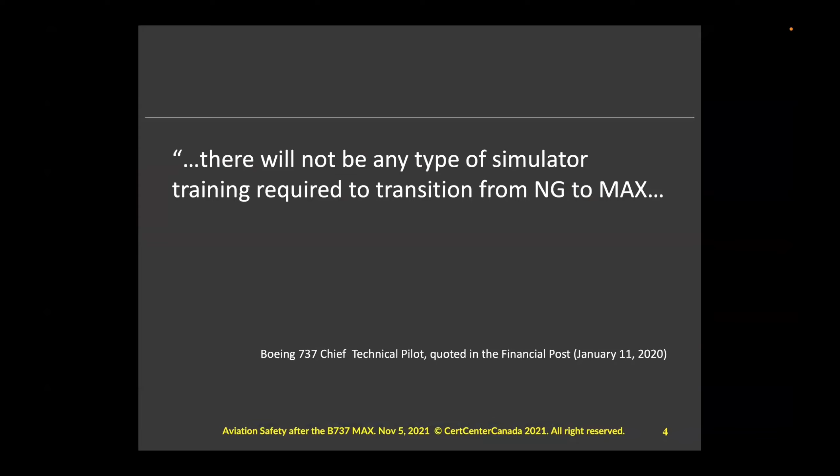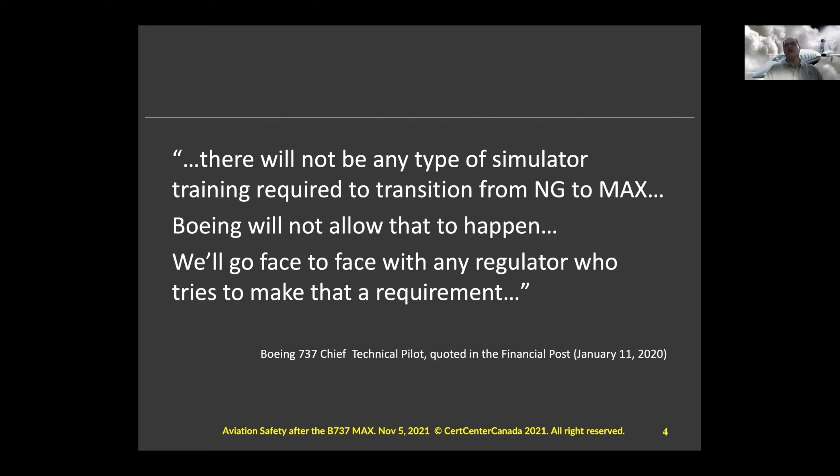So we've seen that Boeing is facing enormous lawsuits, so let's find out how they got into this position. First of all, these are my opinions. They're not Transport Canada's, and I'm not acting as a delegate, so please be aware of that and take it accordingly. I'm going to look at how we certify, what happened to the MAX, the two accidents, and the lessons learned. First of all, certification.

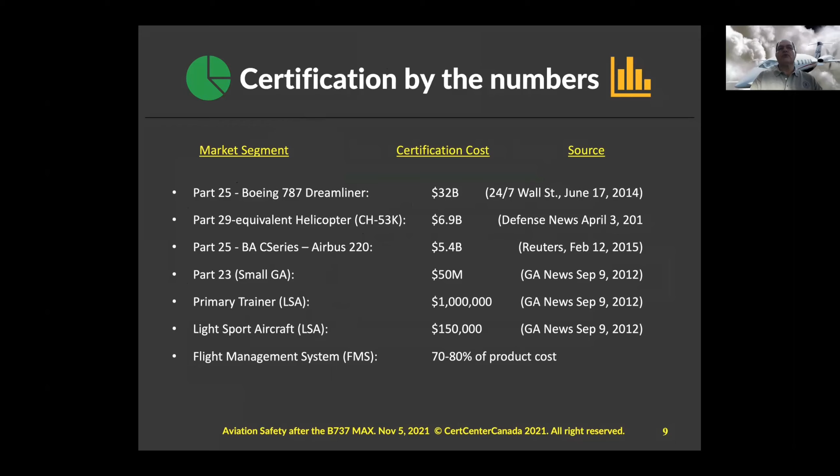To give you an idea what it costs to certify an aircraft: if we look at the top row there, it's of the order of tens of billions of dollars. And not only is certification expensive, but changes to certification are very expensive. In fact, many aircraft programs are bet-the-company programs. The 747, for example, was one such program.

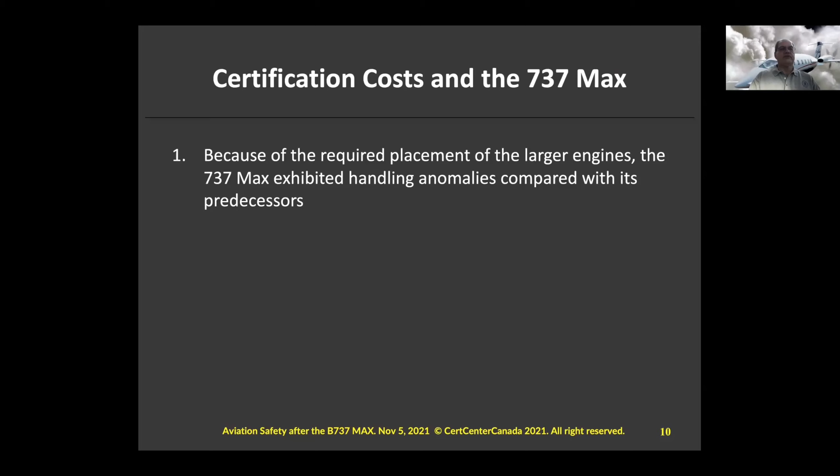So let's look at the MAX. Big engines, bigger than before. They had to be crammed higher up on the wing than the old ones to clear the ground. And so it handled differently. That meant that pilots would need some training. And if the pilots needed training, the simulators would have to be changed and the reference materials would have to be changed. So this is not a matter of whether the airplane is safe or unsafe. It has nothing to do with that.

It has to do with: will Southwest now have to modify its simulators, write new training materials, double qualify pilots for MAX and non-MAX? The repercussions to an airline are in the hundreds of millions for these types of changes. They're not trivial in any sense of the word. So the reason we don't want to train people is not because we want untrained people. It's because if we accept that the aircraft is different enough that we need to train everyone, then we have to adopt different training programs for different pilots, use simulators, etc.

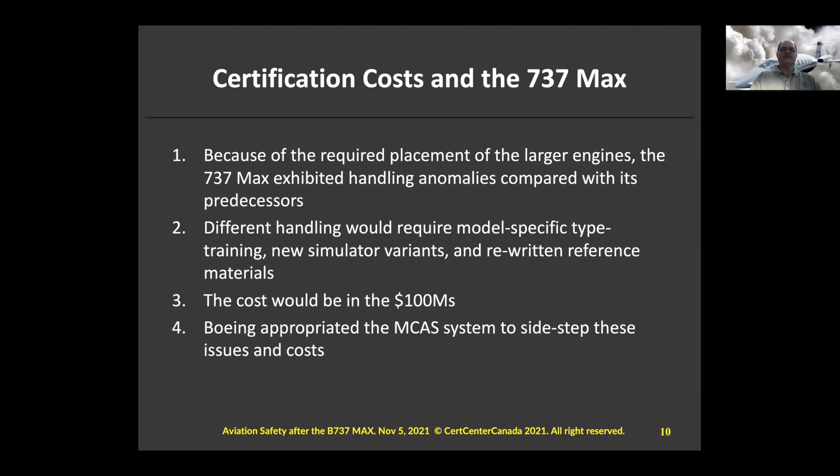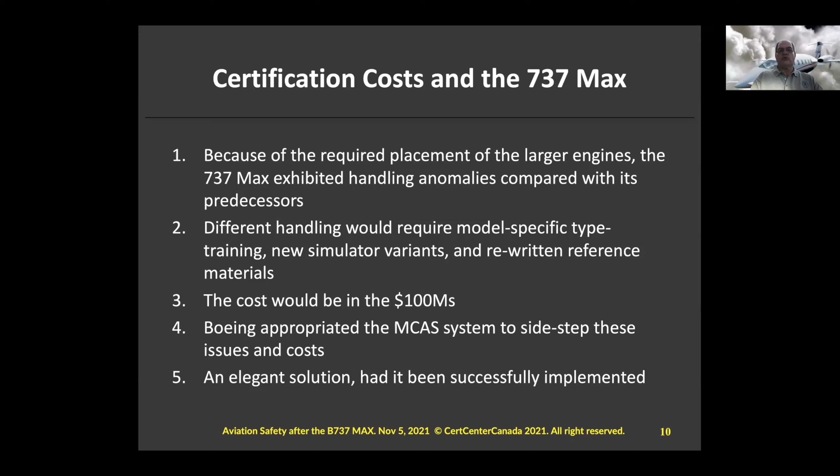So there was enormous pressure on Boeing to not have recognizable differences between the MAX and the preceding models. So they appropriated the MCAS, which was used in another aircraft, I believe the 767, for different purposes, to try and sidestep these issues. And I don't mean that in a mean way. I mean to skirt around them in a way that was functional. Had it been done successfully, it would have been an elegant way out of it. The pilots would not have known the difference between the MCAS-equipped MAX and the normal 737s, Southwest wouldn't have had to spend any more money, and that would have been fine. Let's have a look at certification, and you'll see where this went wrong.

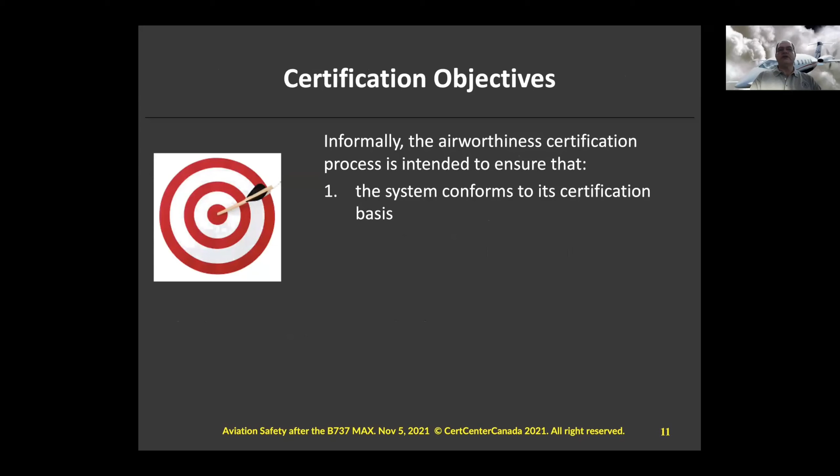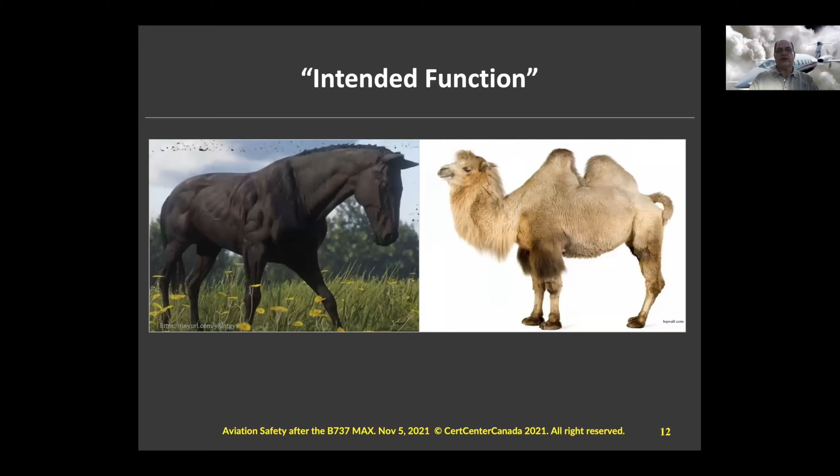We intend with certification to do two things: make sure that we basically meet the cert requirements and standards, and make sure that the system performs its intended function safely and effectively. Intended function is in the eye of the beholder. One could ask, which of these is a better vehicle? And of course, the answer is, it depends. In Canada, which is very similar to the States, we have an act that empowers the regulations, which invoke standards that are supported by guidance and advisory material.

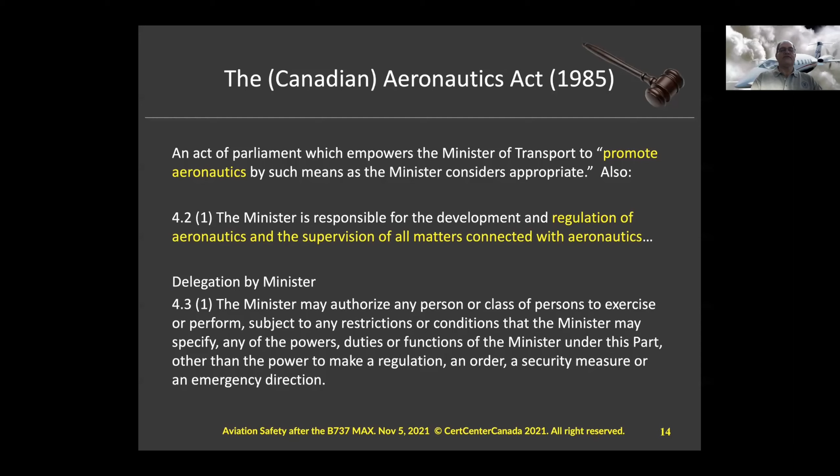The Canadian Aeronautics Act has a dual role for the minister, which is interesting because the MAX plays into this. The minister is responsible for regulation and for promotion, which is an absolutely conflicting situation of trying to promote and regulate at the same time. The minister also is in charge of delegation, which allows people like me to act as test pilots for Transport Canada. Now, this conflict of promoting and regulating was taken away from the FAA after the ValueJet crash, where the two functions were split between the NTSB and the FAA. So the FAA has no promote-aviation function anymore. And this is where it happened, in 1996.

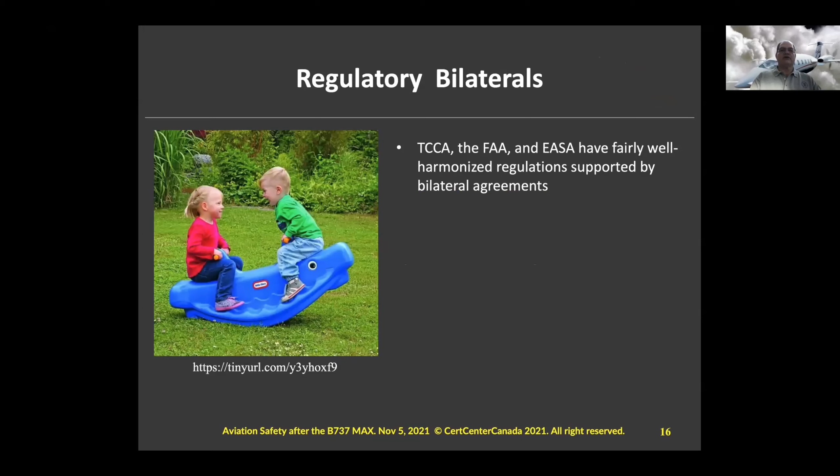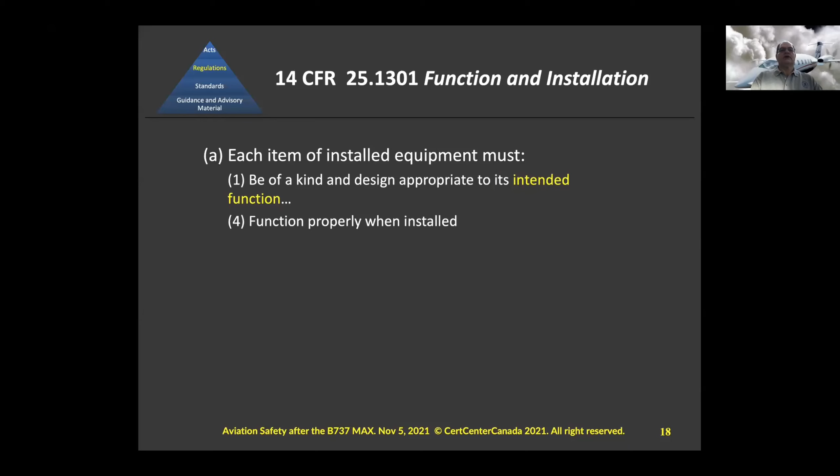So we have bilaterals between the FAA, Transport Canada, and EASA. Basically, if a dispute arises, the various authorities take it up with each other. And of course, the 737 MAX was certified by such a bilateral. I'm going to go very briefly into software certification. Again, it's about intended function: does it do what it's supposed to do? How do we show that we meet the requirements of the certification? Well, we can do various things.

We can analyze. We can inspect, go and look at the thing. We can see that it's the same as the last one, which may or may not apply. We'll see in a minute. And we can simulate, and finally, we can flight test. Any combination of these things will be used to show that we are meeting our certification requirements. Oh, and we can ground test, of course.

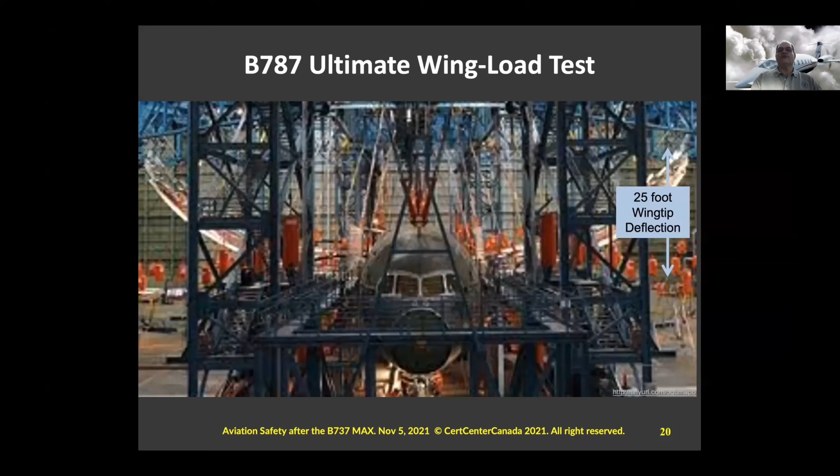This is how you ground test a 787. You can't see clearly in this picture, but the wingtips are the extreme edges of the picture, which is about 25 feet deflection. So if you're wondering if the wings will fall off a 787, if you can still see out of the window and they're not obstructed completely by the wings bending above your head, then no, the wings won't fall off. I won't show you this video, it's a bit long. It's actually showing that test. You can look it up online and look at them when they actually break the wings off.

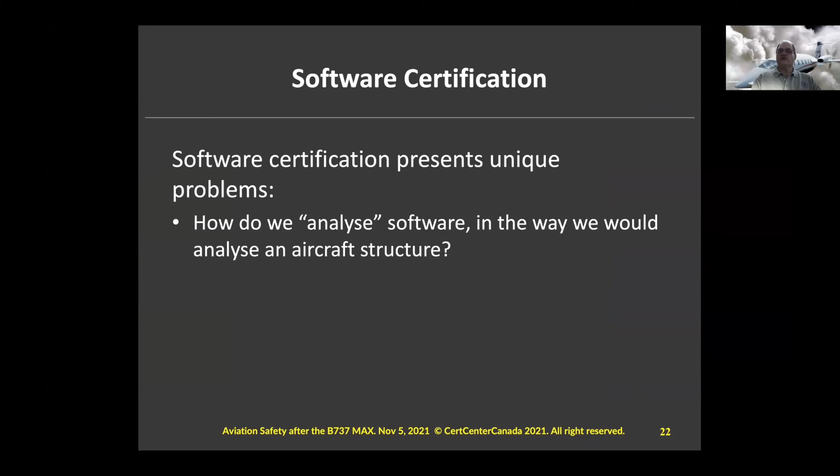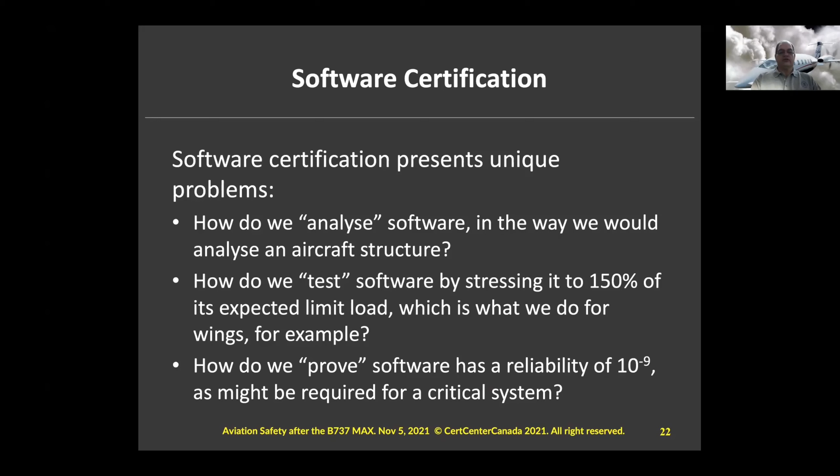Now let's take a look at software, the MAX. How do we analyze software in the way we tested those wings for bending until they broke? How do we test it to 150% of the expected loads, which is what we do for an airframe? How do we prove the software has a reliability that we need? And the answer is, we can't ever prove these things. All we can do is decide how serious the consequence is and how probable that outcome is. And that is what we call the risk.

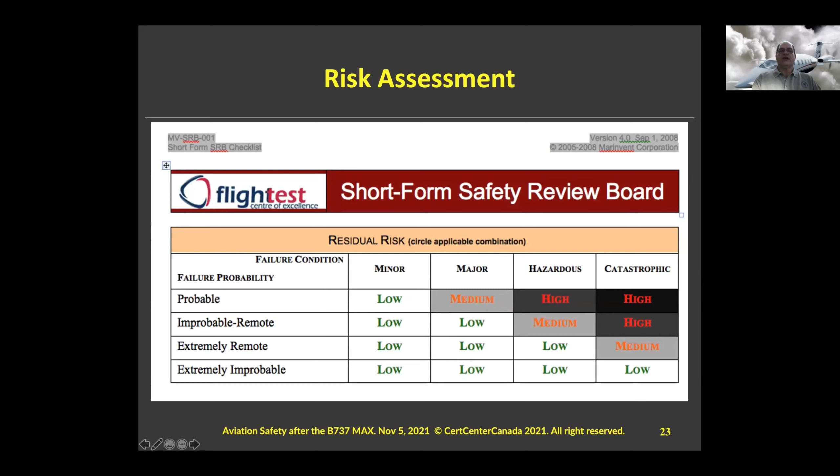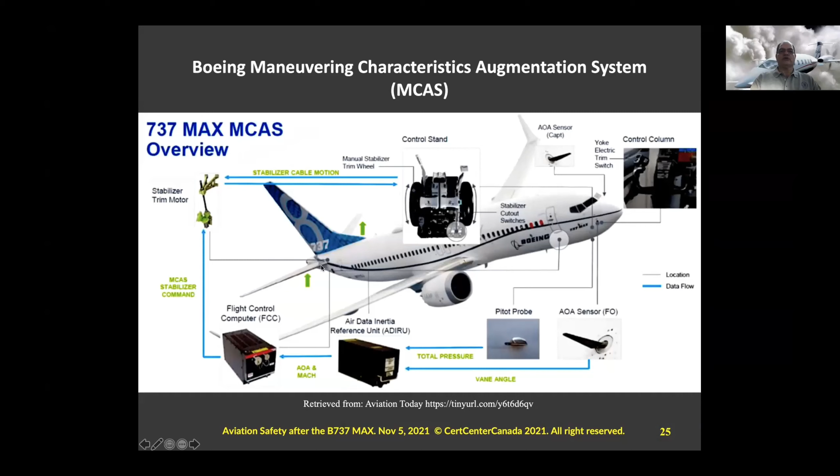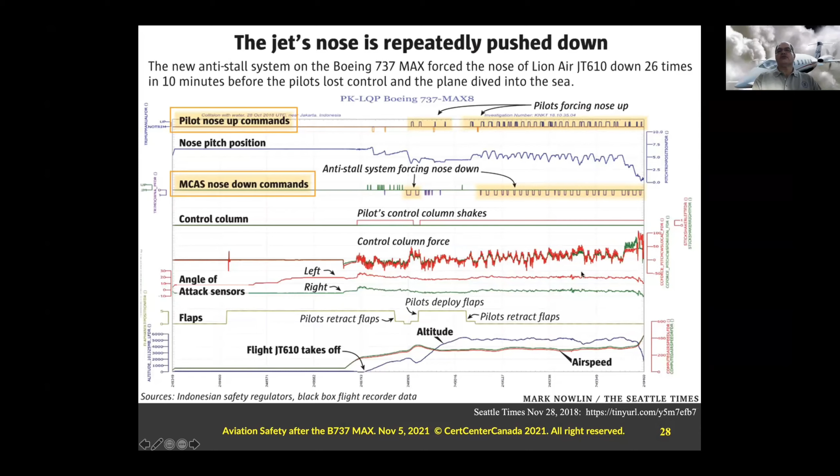Let's look at these accidents and see what happened. Well, Lion Air was the first one. And as we can see from these traces, the airplane started oscillating, and then pitching down until it dove into the sea. This was the MCAS at work, and the crew didn't really know at all what was happening. The Ethiopian folks had a very similar accident, and they knew about MCAS and they'd been briefed, and Boeing alleges that they did not follow procedures. Not completely clear was that the procedures could not have worked as published, and I won't go into the technical details, but that's just the case.

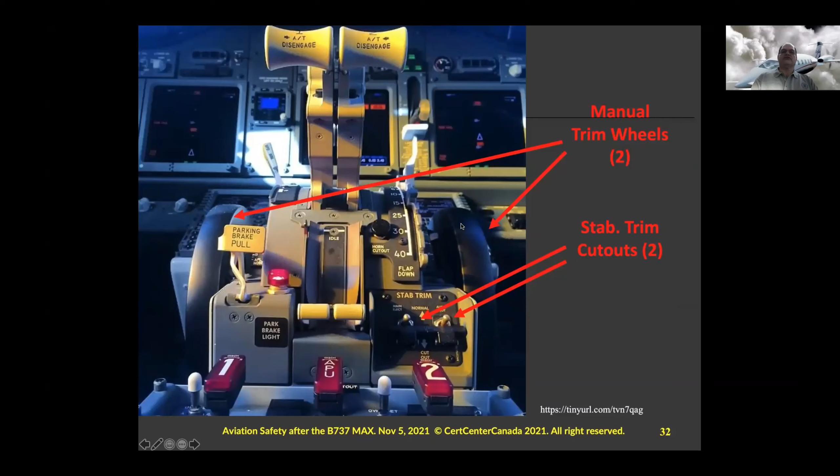So this was the first part of the MCAS procedure, and in their safety analysis, Boeing assumed that pilots would react in the same way as a trim runaway, except that's not what the MCAS does. It moves these trim wheels a little bit, and then takes a deep breath and moves them a little bit more, and then takes another deep breath. So it doesn't behave like the pilots were expecting.

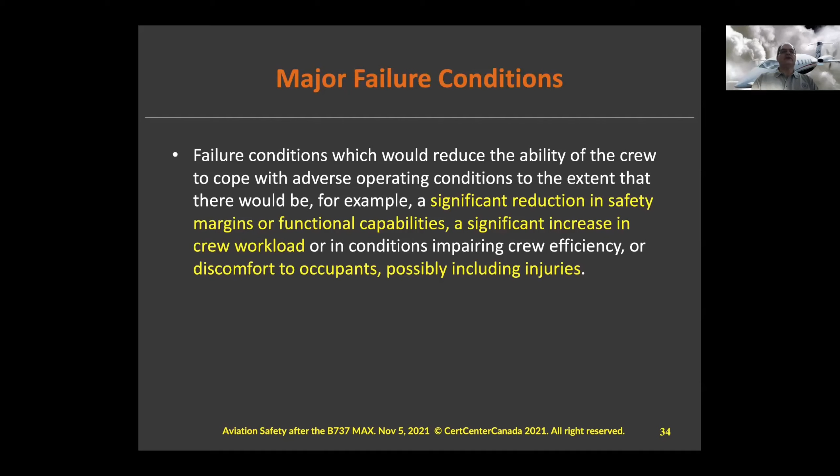Now, we talked about hazards before, and Boeing classified these as major hazards. At major hazards, basically, you are not likely to lose the aircraft, kill anyone. You may injure someone because of a G-force or something like that. These classifications were absolutely wrong. The actual correct classification was catastrophic, which is in the worst case, you will lose the aircraft. Here's a major failure condition, a reduction in safety and discomfort, possibly injuries.

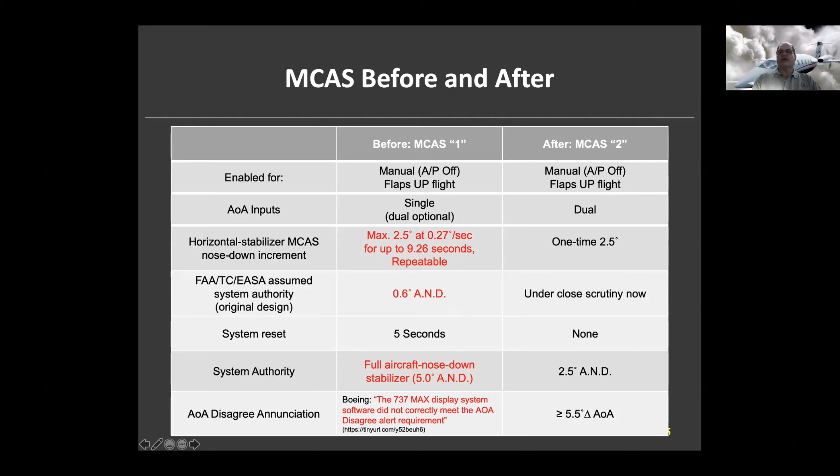As it was implemented, it could repeat forever, every 9 seconds, all the way to the limits of the system that they could trim the aircraft, so 5 degrees aircraft nose down. It had other problems, but the basic thing that happened here is the MCAS had much, much more, actually unlimited authority to control the airplane, whereas as designed, it was not supposed to have that kind of authority. Now in the new MCAS, they've reduced the authority back towards the original design.

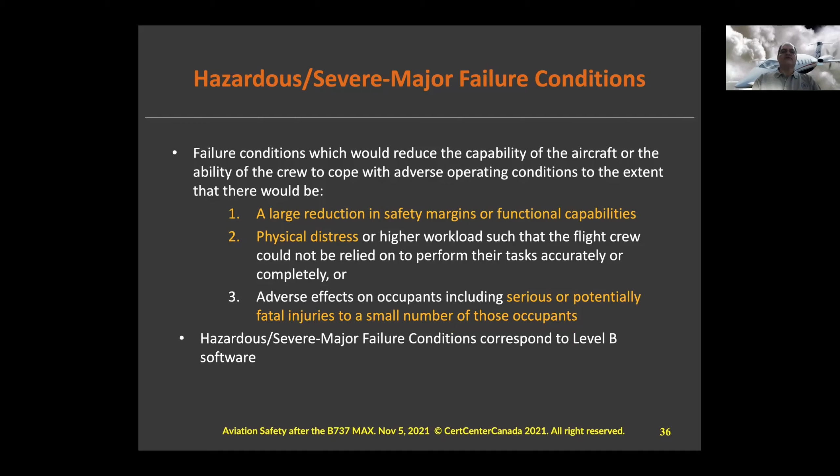So what's a catastrophic failure condition? Well, hazardous severe major is where you can fatally injure some people, and then you also have physical distress and large reduction in safety. Finally, catastrophic is where you lose the aircraft.

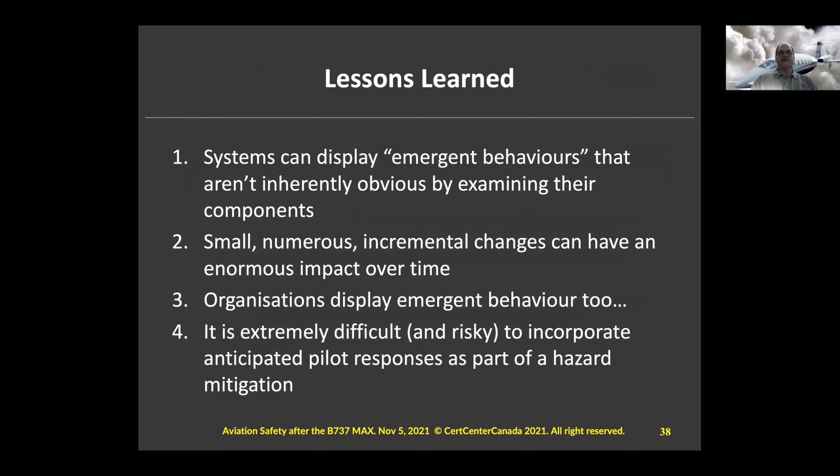Now let's have a look at the lessons learned. Systems display emergent behaviors which aren't by design. I'll show you some of those in a minute. Small, numerous incremental changes can have an enormous impact over time. Organizations display emergent behavior, and it is extremely risky to incorporate how the pilots will respond as part of your safety case, even though that's inherent in the regulations.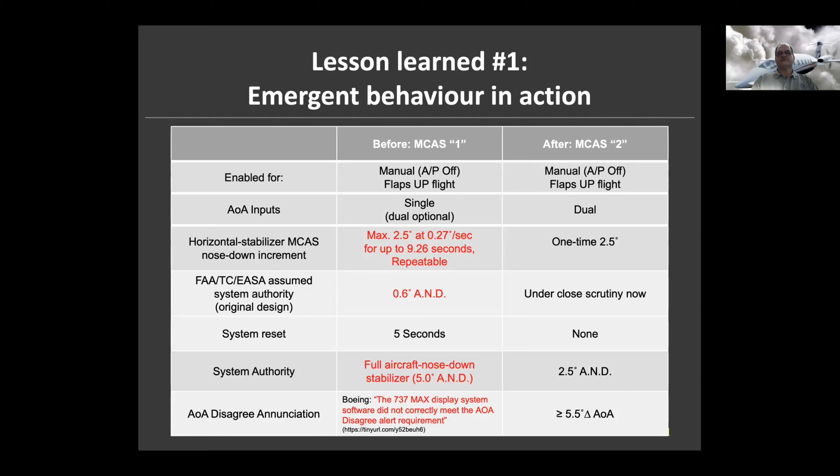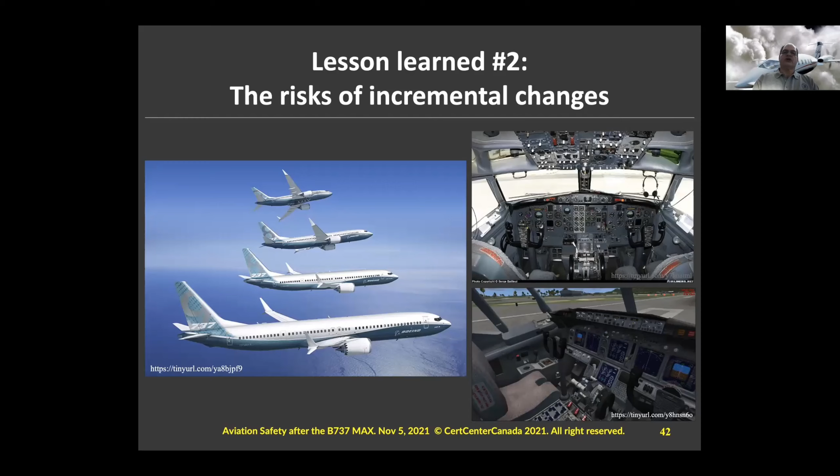Looking at the second element, incremental changes. This is a family tree from the 737, and it's allowed to be certified under the same type certificate. Having a look at the aircraft sizes, the latter ones are almost twice the size, almost twice the thrust. Look at the cockpits, old at the top, new at the bottom, completely unrecognizable, and yet more or less certified under the same type certificate. It's okay from one model to the next, but when you add all those increments together, here's a comparison.

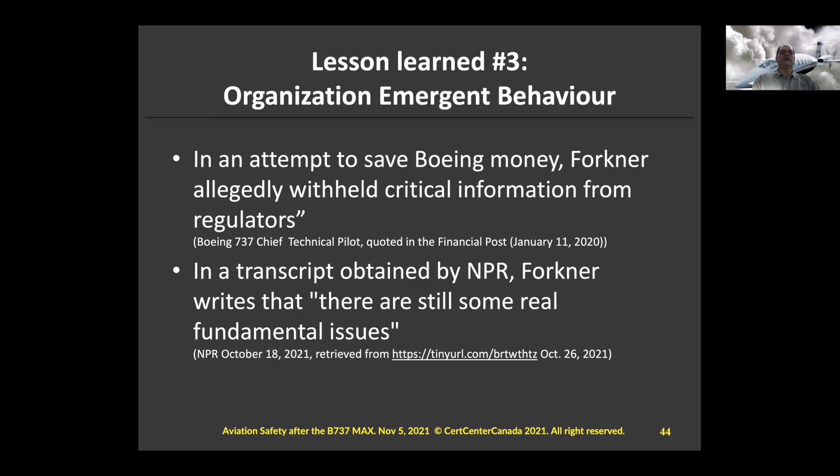So, organizational behavior. In an attempt to save money for Boeing, and this is company fidelity that Forkner was showing, he withheld critical information. He wasn't saying we need untrained pilots, let them take their chances. He was saying that the MCAS should handle the system and we can avoid all the expense that I showed at the beginning. In this, he was wrong and it was bad judgment. I don't think this was an evil act, I think it was a very ill-considered one. But that went through the whole company and eventually to the point where he actually, although he understood there were real issues, withheld that information from the regulators. So that's where he crossed the line completely from company man to well, potential indicted criminal.

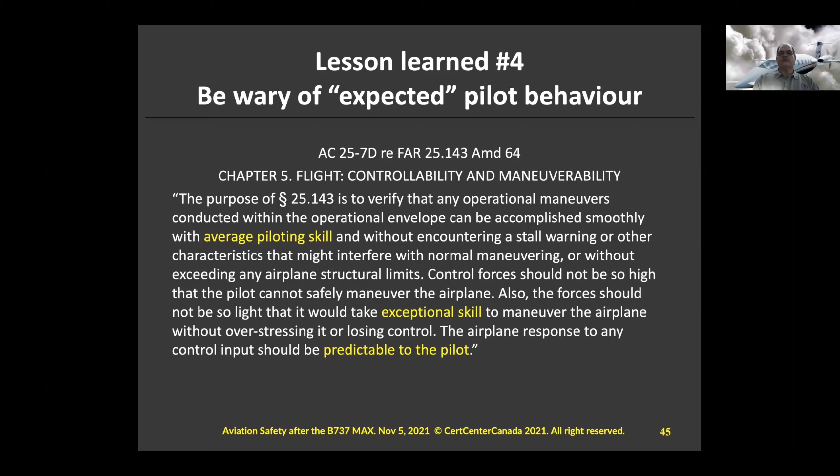Last lesson learned, and I'm almost done here. The regulations repeatedly state that a pilot mustn't have to exhibit more than average skill, should certainly not have exceptional skill, and the system response should be predictable to the pilot. When I do flight test work, one of the things I have to do is not act like I've done 100 practices at this one maneuver, but try and put myself in the shoes of someone who's flying his or her fifth flight of the evening, having had no lunch or dinner, in bad weather, with a co-pilot that doesn't seem to be on the ball. That's the situation we should be designing for.

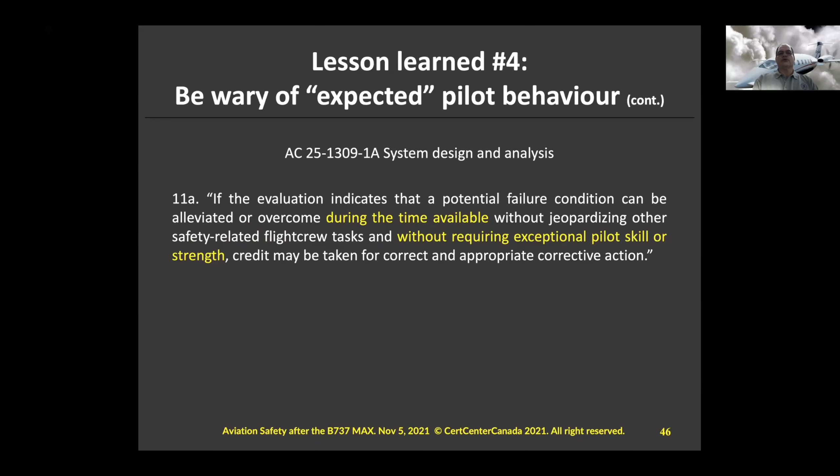So in the time available, the regulation says that we should not have required exceptional pilot skill or strength. And it turns out that both would have been required to implement the Boeing procedures after a few seconds with the MCAS. That's why Ethiopia went down, because they tried the Boeing procedure and it didn't work because they couldn't physically move the trim wheels. So we're back to where we started. Forkner was trying to save Boeing money, well-intentioned.

The documents did not have MCAS reference, nor were the pilot training materials comprehensive. It was a few minutes on an iPad. This is what was found by one of the congressional studies, but it was because the emphasis was supposed to be on similarity with the previous aircraft. It wasn't a lack of caring about pilots or their ability.

It was to try and emphasize just how much this was the same as the old aircraft. So that's where I would like to end it. I'll be happy to engage in questions later, but I think you can see that this very complex interchange of technology, procedures, regulatory imperatives, cost, marketing, and everything else came together for the perfect storm with the Boeing 737 MAX. Thank you for your time.

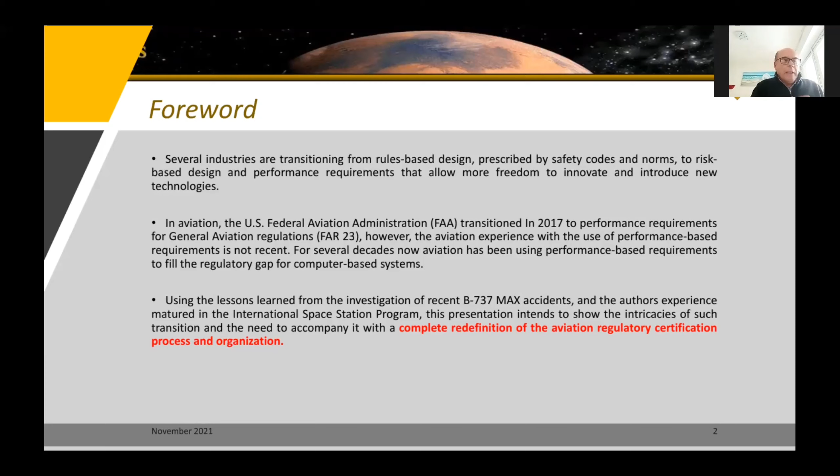Until the 70s, when I was working in industry, up to the beginning of the 80s, every control of the engine, of the flight itself, etc., was managed through mechanical items. From the 80s on, this was changed with the introduction of computers in many of these functions. So at a certain point, an industry that was evolutionary had to adapt to a new setup.

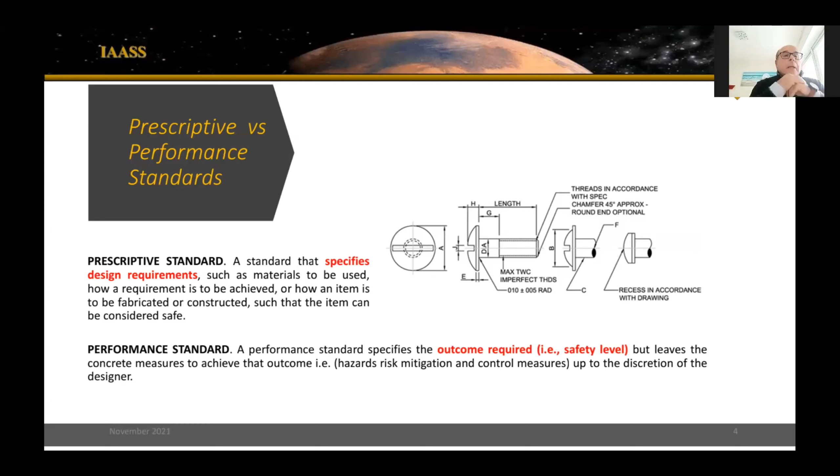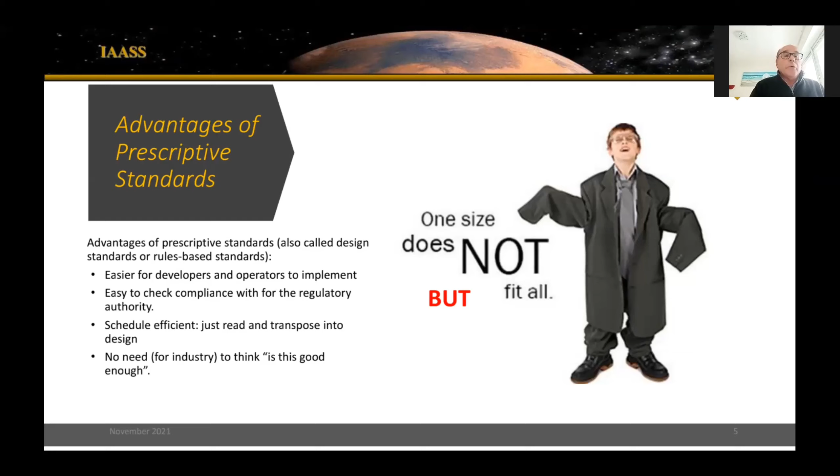So what is the difference between prescriptive and performance standards? As I mentioned, a prescriptive standard is a standard that tells you in detail how you should design your system, while a performance standard specifies the outcome required in terms of safety level. So what is the safety that your system must achieve? The advantage of prescriptive requirement standards is very clear: you follow the rules, you apply the rules. These are inspected, tested, as John was saying, by similarity or by inspection and flight test, etc. And then you comply with the rules and the game is done. There is no need for you, as industry, to think if something is good or not.

There is an example which I always mention about how prescriptive standards fail. Generally, prescriptive standards are issued with a certain state-of-the-art technology in mind. So the example I mentioned is the Titanic, which sank, as many of you will know, in 1912. 1,500 people lost their lives because there were not sufficient lifeboats on board.

This was because the very specific prescriptive requirement about the number of lifeboats on board had been established something like 20 or more years before, based on a tonnage that at that time was the limit.

So prescriptive requirements tend to become obsolete because they basically take into account the technology of the time. They are not very good at anticipating future evolution. So what we call a rules-based design is a design of a system done according to the prescriptive standard.

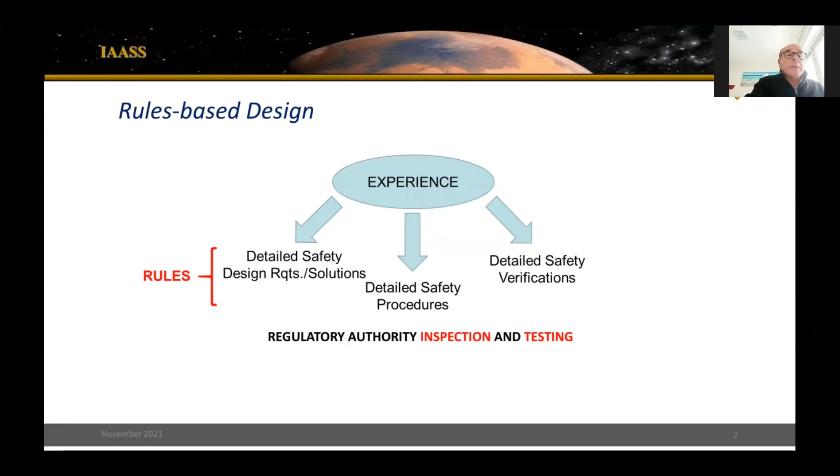Now, performance standards are the other kind of standard, introduced to facilitate innovation, for industries like space or nuclear weapons, where there was no previous experience and no willingness to accumulate experience through accidents.

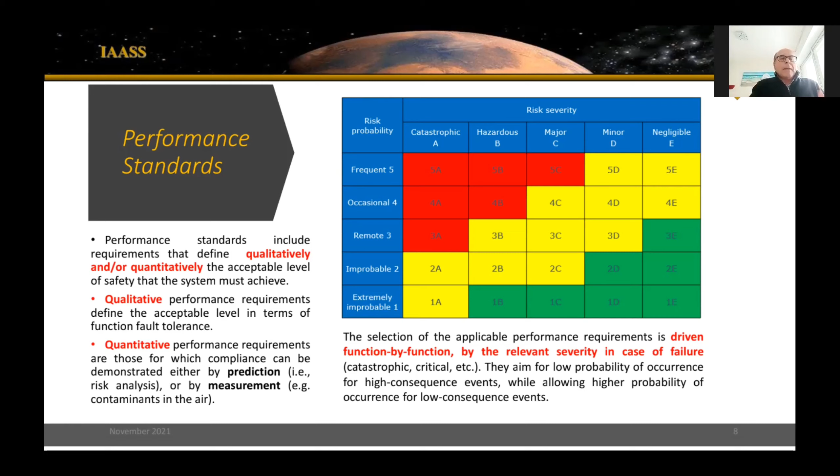Performance standards instead provide either a quantitative target - the failure rate or loss of the system, the dose on board should be less than one in a million flights, for example - or a qualitative requirement, which basically tells you that the system design should aim for, say, fail-safe or fault tolerance in general: the possibility that one part of the system fails but the other part takes over and continues the functionality.

The advantage of performance standards is that they are generic, not linked to a specific technology. But at the same time, they do not present a checklist of how you have to comply, because going from the rules to the detailed design requires, in between, performing a hazard analysis.

What is a hazard analysis? It's very simple: it is the investigation of a potential condition that, as the design is done, could lead to an accident. This is a hazard analysis.

So nowadays, for innovative, very advanced systems, you have fault tolerance requirements. Then you perform a hazard analysis and identify what are the potential conditions that can lead to a failure. And then it is up to the designer to find the design solution which will meet the objective of the performance requirement.

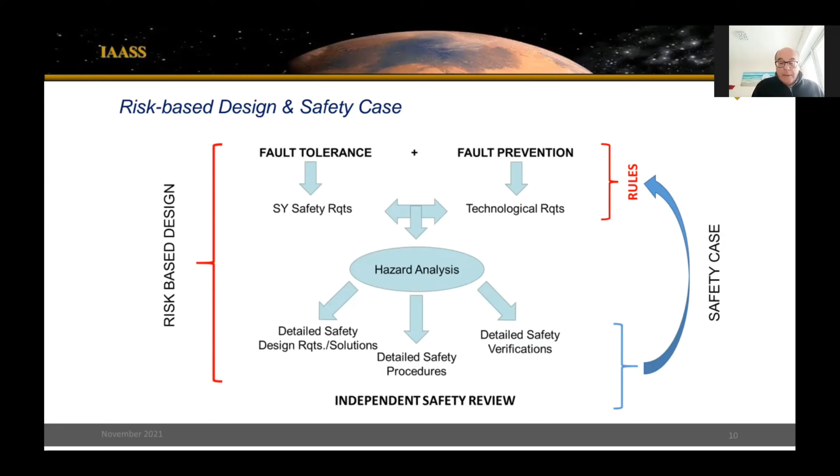What is now the big difficulty linked to performance requirements? You need a client team that can validate the design in terms of meeting the objective. So the team that has to evaluate the design must have not only capabilities of checking analysis, inspection, test results, etc., but must truly have the capability to judge the overall design as able to meet the objective. This means that team needs skills and capabilities equal to, if not better than, the design team.

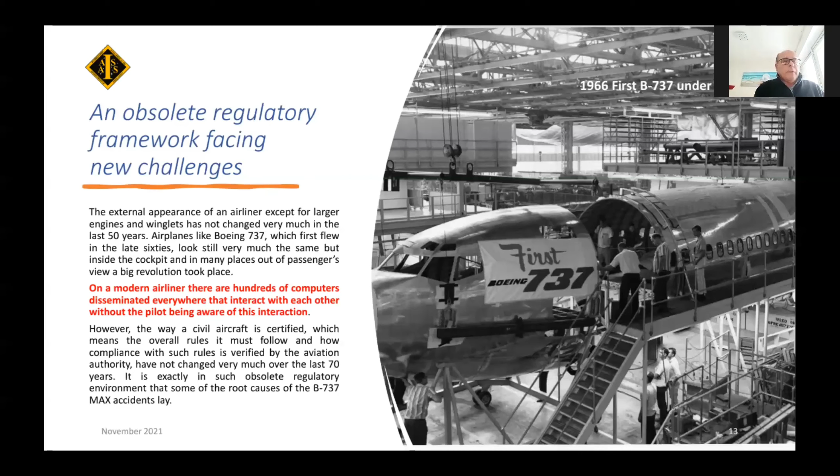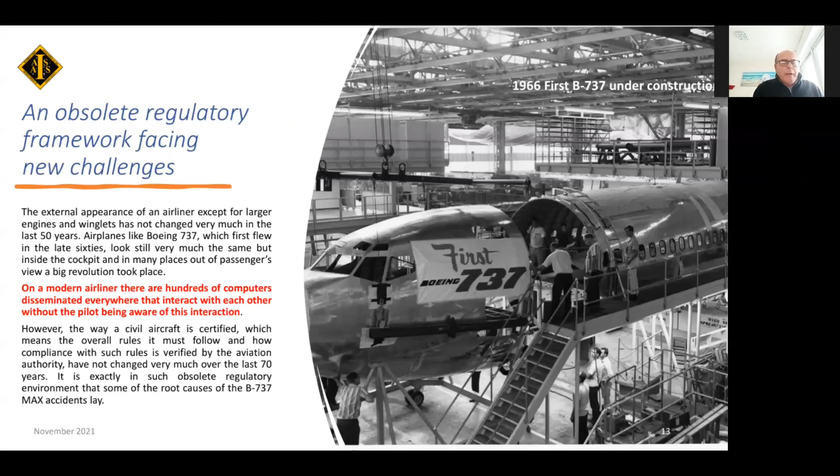The case of MCAS - I will go very quickly. The Boeing 737 entered service in 1967, so it's already more than 50 years in operation and has been evolving continuously. When it was conceived, the B737 was meant to operate at airports that would not have sophisticated ground facilities.

So the airlines, and Lufthansa in fact was the launch airline for the B737, wanted an airplane that would sit very low with reference to the ground, to have the possibility to deploy their own staircase for embarking and disembarking passengers. This gave the Boeing 737 a very typical configuration.

And here is where the problem started in terms of evolution, because the engines in the last 50-plus years have been evolving under various aspects, but physically becoming wider and wider in diameter. This created a conflict with the low stance of the aircraft on the ground, such that when finally the engines were selected for the future version, the B737 MAX, there was only one possibility to place those engines on the airplane: to move them ahead of the wing and a bit higher.

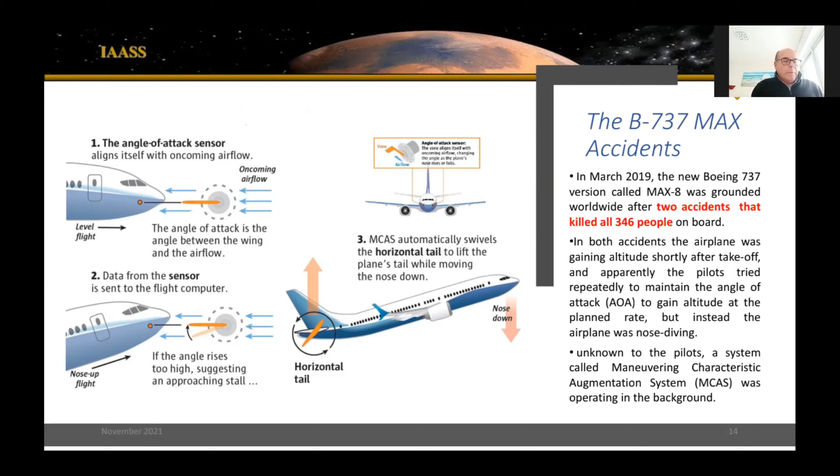By doing this, Boeing basically altered the intrinsic stability of the airplane. And this is when they introduced MCAS, to avoid that the airplane, during certain maneuvers, could exceed a certain angle of attack and therefore go into a very dangerous situation, which is called a stall.

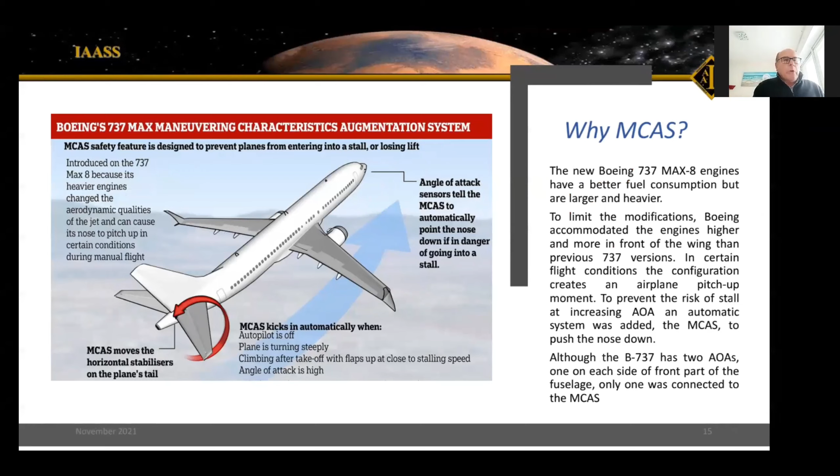Now, I mentioned automation. Automation in aviation started in 1980, and basically the idea was very simple: no longer a physical, mechanical, and sometimes hydraulic connection between flight controls and the pilot input, or between the pilot input and the engine, but instead a data bus computer.

Now the problem with the computer is very simple. We don't have a requirement at that time, and we don't have today, and we will not have in the future, to say exactly how a new system should be designed to be safe. So we can say what the system has to achieve, we can give performance requirements, but we cannot give detailed prescriptive requirements.

The computer has one characteristic: you cannot be 100% sure that it will always work well. So from this comes the necessity to have a second computer doing the same function as the primary one, and then you need a third computer to compare the results of the first and the second, and sometimes you need a fourth one if you want to continue operation, the so-called fail-operational. So the architecture that you have to realize when you have an automatic system can become really complex. But this complexity, of course, is reserved for systems that are safety critical.

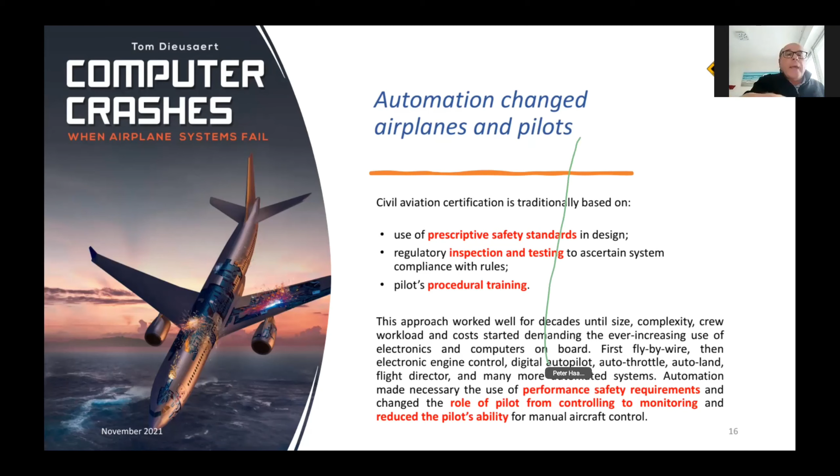Now, if you fail to properly categorize and classify the function in terms of criticality, here there is the risk—basically this was the one with the B737. So what happened with the 737? There were performance requirements assigned which were values attached to the idea that the function was not catastrophic, but was major.

This conceptual mistake was possible because, using the previous rationale—the one used during the traditional design of airplanes—it was considered that pilot intervention would have been able to control the events, what John referred to as the runaway of the stabilizer, and this would have avoided the catastrophe. So there was a conceptual mistake in the development of the MCAS for the B737: considering a risk mitigation measure, the intervention of the pilot, as something that could truly change the classification of the risk.

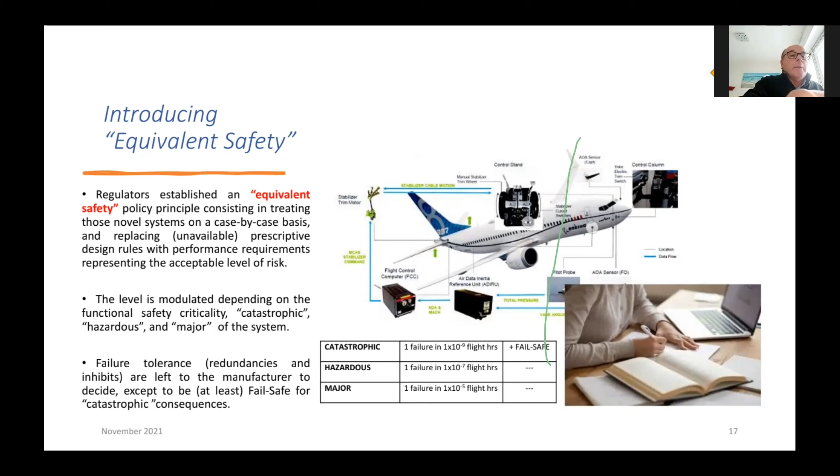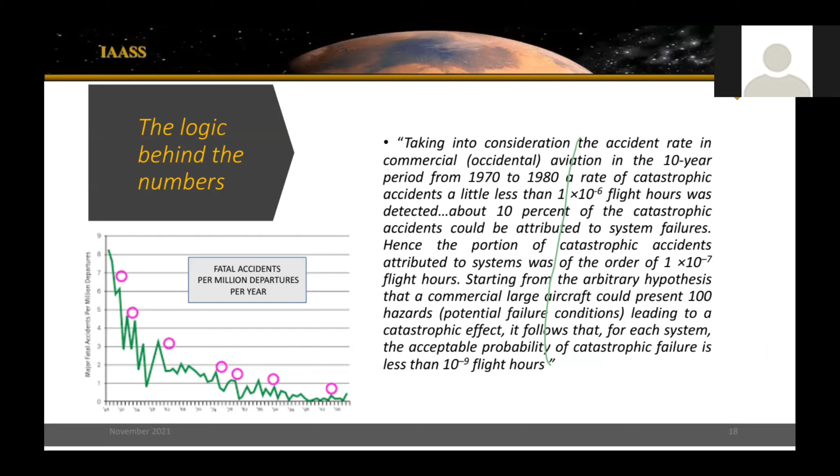So basically, with the introduction of automation, the design of computer-based systems in aviation changed from implementing detailed design requirements and design solutions, to performing a failure analysis to show that the computerized system had the same reliability that could have been expected with a mechanical system.

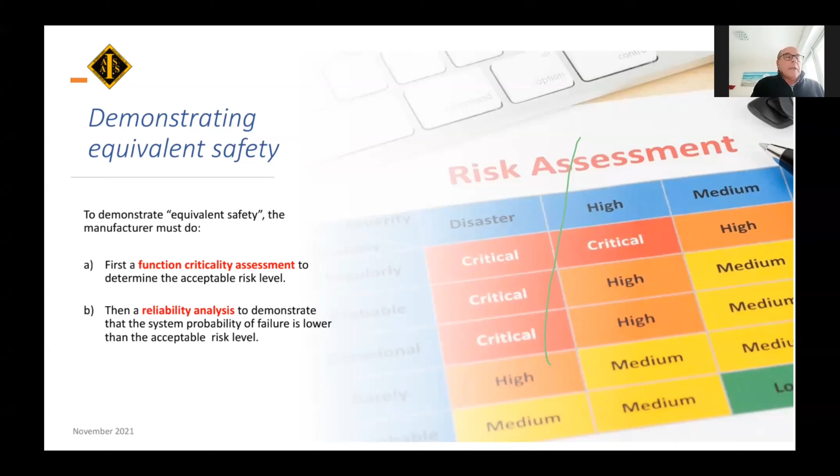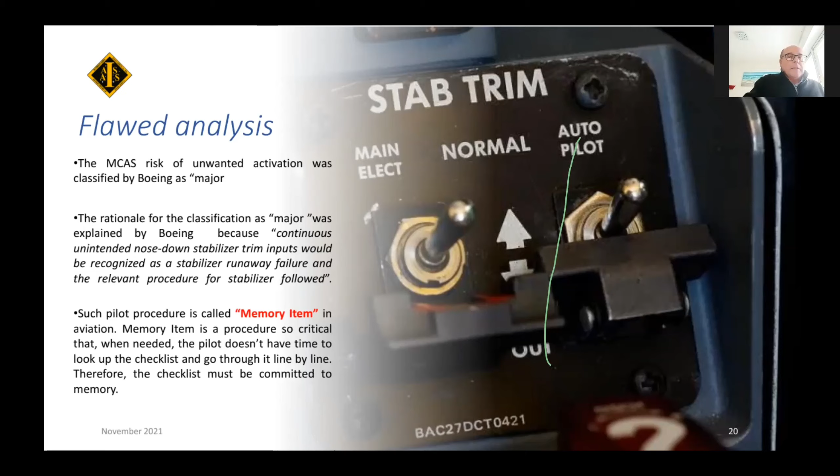Therefore, the verification of compliance of a computer-based system with the requirement became a matter of assessing the criticality of the function. So what was wrong with this overall approach was the attempt to keep the same logic used previously, when everything was mechanical on an airplane, dividing mechanical failure from the training of the pilot, etc., and applying that same approach to automatic systems. This has been basically the flaw. An additional and fundamental flaw has been using the risk mitigation—the pilot intervention—as a way of changing the classification of the function itself.

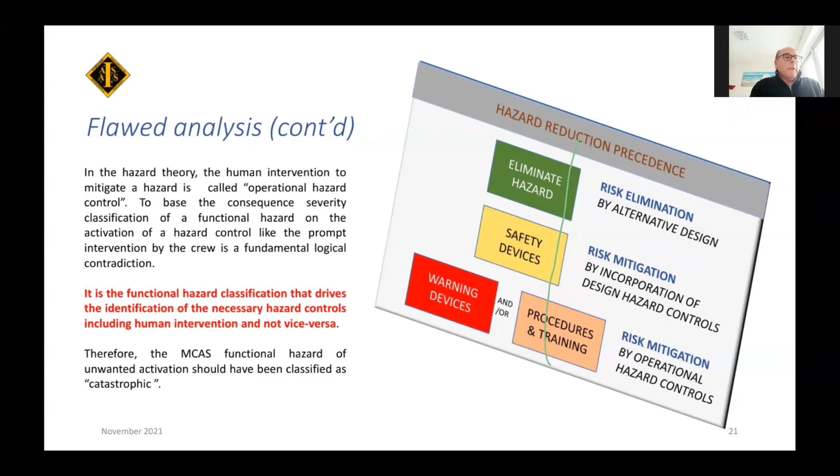Okay, so the overall approach is therefore in question. Nowadays, apart from all the relevant and important points raised by John in his presentation, which are totally valid and true, there is a fundamental problem: to manage a complex system in aviation, we need to analyze the system in its entirety and with reference to the various interconnections. So we cannot separate hardware from software and from the human—the hazard analysis, the safety analysis, must keep all three elements into account.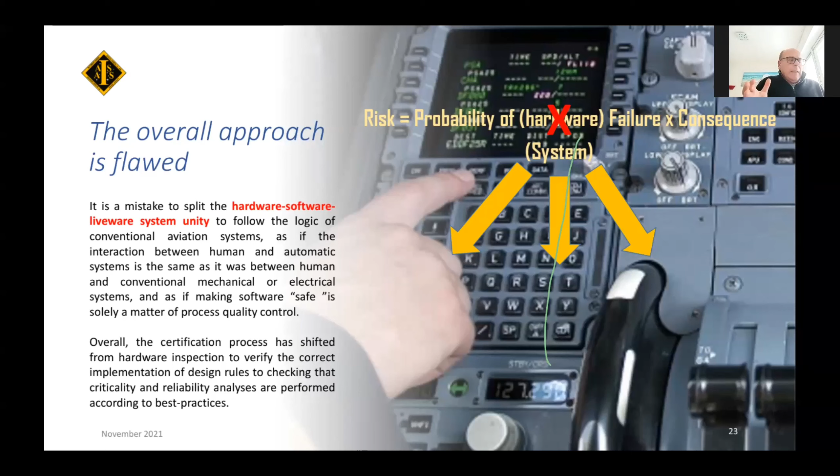What I tell you is the right way, in my view, to do things is basically the way the space station has been built. The space station was built using performance requirements and integrated hazard analysis, which did not separate between the human, the hardware, and the software, and addressed the relevant risk mitigation holistically.

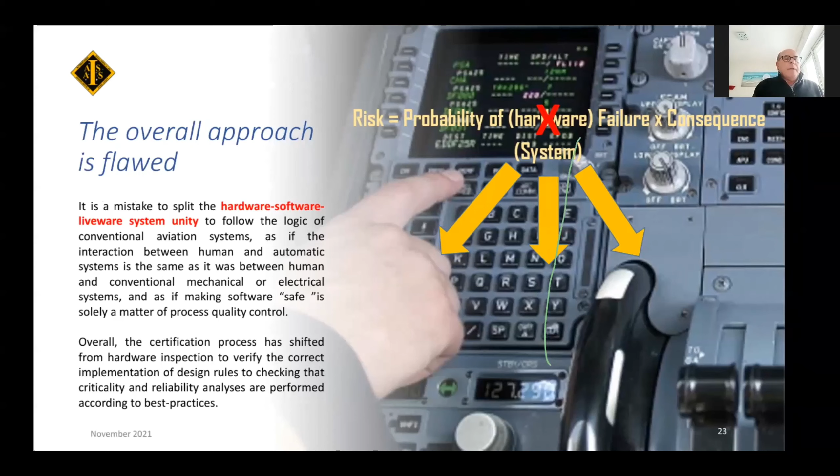Finally, there is one point that needs to be said. In the last 50, 70 years, we could say, the regulators had enormous difficulty maintaining the skill and resources to check the certification of major developments like the Boeing 737 or Boeing 777, Airbus, and so on.

So basically, what happened? There was a delegation approach, up to the point that as of 2018, 94% of the certification activity for a Boeing airplane system is done by Boeing itself—94%. And this is linked largely to the complexity related to prescriptive requirements, then the introduction of performance requirements. The more we move into the performance arena, the more we risk having inadequate resources at the regulatory bodies.

What basically is the proposal that my association has advanced in other fields, in the space field, is to create between the regulatory body and the industry an intermediate organization, technical-oriented, not permanently staffed by the same technical people and scientists, but which would call the expertise of selected people with current and updated knowledge of new technologies. So not a new technical bureaucracy, but an organization that could bring the best knowledge from industry, regulatory bodies, and academy to work together as a validation team for new designs.

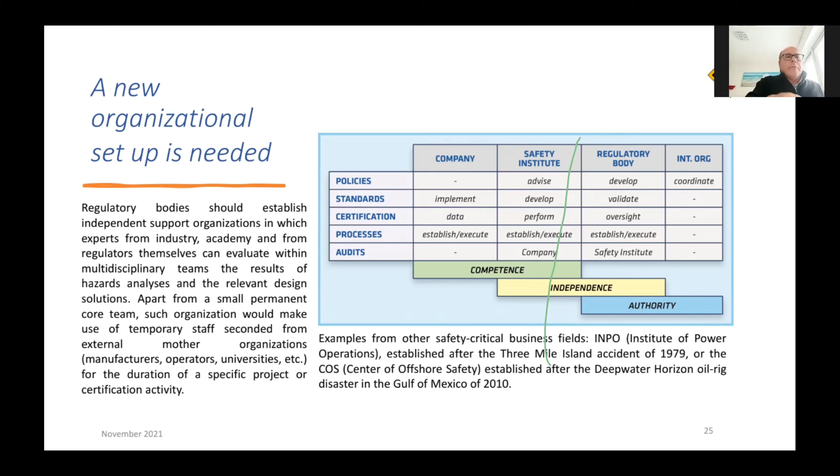The conclusion of all this is the following. The current airworthiness standards are either antiquated or inadequate. And therefore, we need not only to look into the numbers, but we need truly to look into the system design.

And for this, we need to de-emphasize quantitative requirements and instead prefer qualitative requirements. I am glad to see that the administrator of FAA announced a few days ago that they will do exactly this. They will have more emphasis on fault tolerance and fail safe for all safety critical functions, and use quantitative analysis as an additional support and not as the primary logic.

Secondly, today we have this separation between hardware, software, and human factors that are considered separate, and this needs to be reconciled. Therefore, in aviation, we need to introduce updated techniques for hazard analysis.

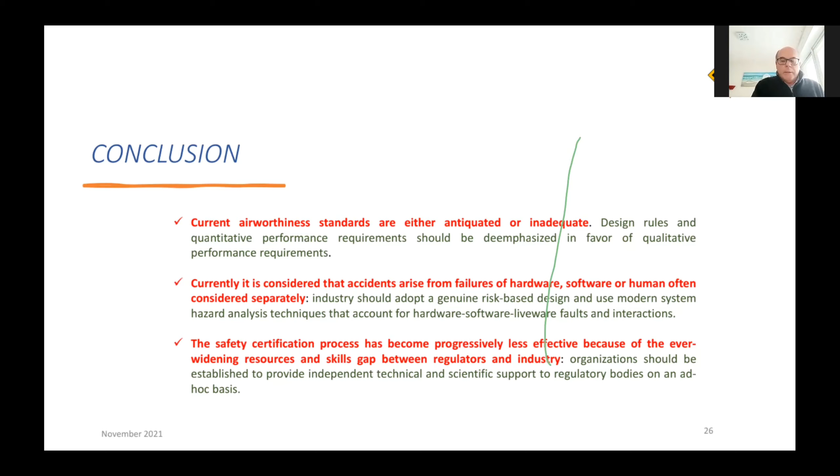And finally, because of the difficulty that has been mentioned and is well known in terms of skill and updated human resources, it is necessary to reconsider the way and the kind of activity that a regulator can do. And from here comes the proposal that I mentioned before. Thank you very much for your attention.

Thank you, Tommaso, for a highly informative presentation. And thank you also for putting in your conclusions a focus on the effects of the widening gap regarding skills and resources between the manufacturers on the one hand and the regulator on the other hand. And of course, there will be opportunity to discuss your conclusions.

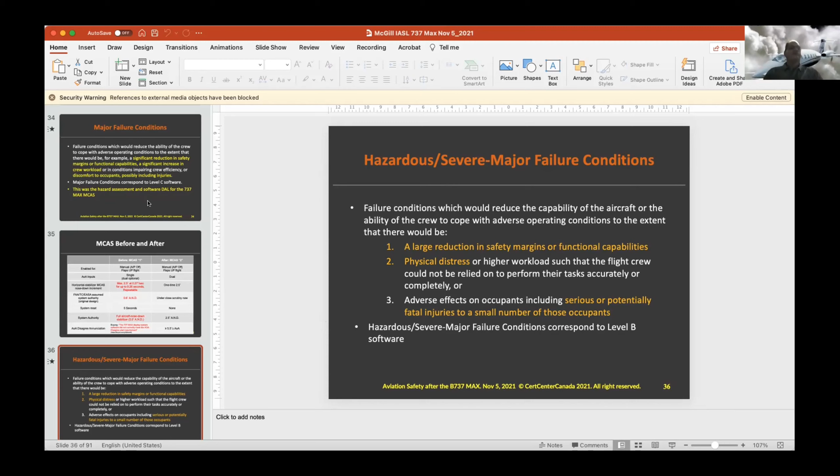And it goes into every one of these classifications. A major failure condition talks about reductions in safety margins and increases in workload, discomfort to occupants, and possible injuries. So when you operationalize these characteristics, every word matters, and the legal experts among you will spend a lot of time trying to find out what the right words are to properly define everything in a way that is reproducible and not subjective and open to pressures and interpretation to suit the company. Thank you.

Thank you, John. I will now invite Tommaso to also comment. Yes. Please, Tommaso.

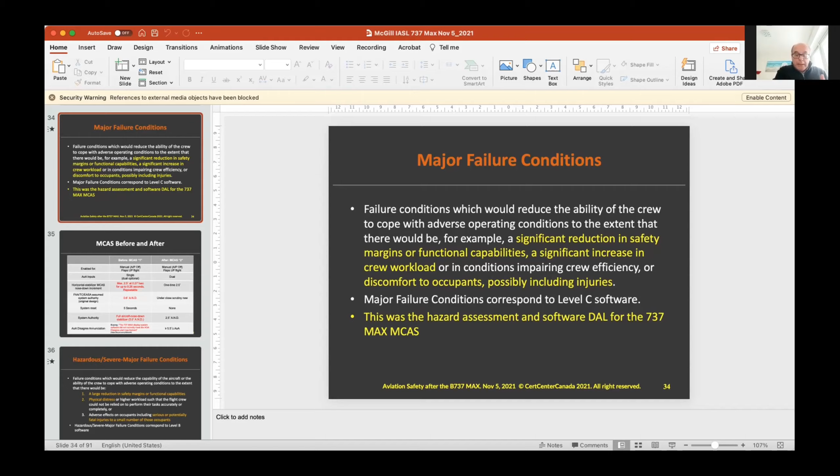I like very much to comment about this, because in the space field, we have accumulated substantial experience in how to deal with performance requirements and how to deal with subjectivity. So what we did with the shuttle payloads: I have to remind those that are not completely aware that the shuttle was meant to transport to orbit big satellites like the Hubble telescope, or upper stages for further orbital injection of payloads, habitable modules, etc.

So the requirements for payloads to be carried by the shuttle were requirements about a rather complex system. Nevertheless, because these systems had been and were in progress of being developed by other organizations, the requirements were performance-oriented and not how you designed the Hubble telescope. How was the problem of subjectivity dealt with? In two ways. One, there was a collection of so-called interpretation letters.

So NASA periodically, as the need arose, issued interpretation letters explaining better the intent of the requirement, and in some cases, ways of meeting that requirement that could be considered acceptable. Not the only way of doing it, but a way that was customary and would be acceptable. This was a set of documents, interpretation letters, very clear also in the title.

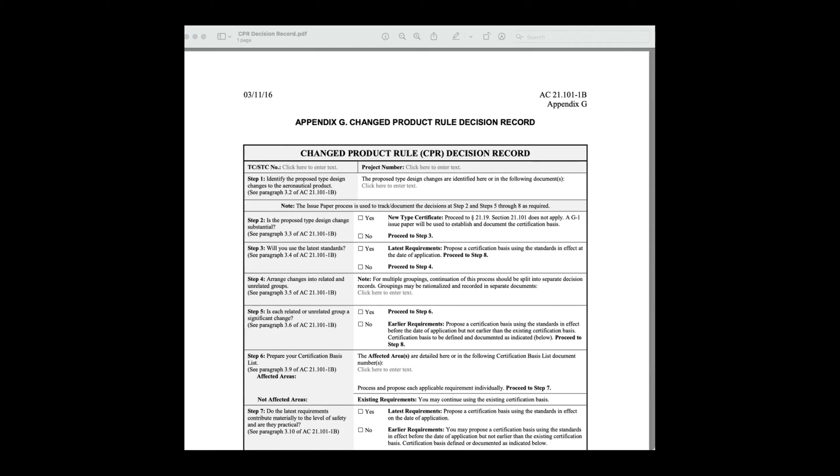To try to cooperate more, because the more the certification relies on this kind of aspect, the more they need to have a common culture, common understanding, common practices. So this is my comment. Yeah, I just want to add, John, we just need to put incentive for the aircraft manufacturer to be able to update and fix problems. Are you asking a further question, or are you having a comment?

If it was for me, I just wanted to mention that certification needs to put incentive to be able to fix the problem, known problems, open problem reports, and to improve the aircraft. So right now, the huge resources involved in making any certification or modification is a disincentive to improving aircraft.

Okay, John, please. May I address some of the comments that are made, Philippe? Some of the things you said are right. Some of them are point blank wrong. Of course, 4754 was applied. Of course, 1309 was applied. Those regulations have been around in the aircraft. Absolutely, I have done analyses on that aircraft in those two contexts. So, it's not called a grandfather clause. It's called the changed product rule. And the changed product rule doesn't let you just keep the same type certificate. It forces you through a tree where the outcome tells you what certification basis you need.